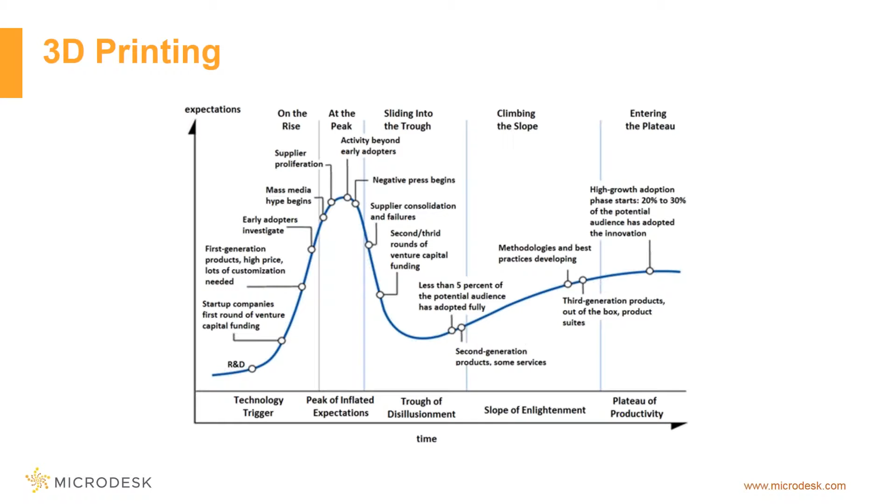Materials aren't the only advancement that's allowing 3D printing to be looked at again for infrastructure. Robotics have created the opportunity for additive manufacturing to be performed on site. With guidance from a 3D model, robots are capable of printing in the field and not in a workshop or a lab. We'll witness additive manufacturing robots on site at increasing rates, constructing pipes in the field in accordance with the project model or part specifications, and no more ordering, just basically programming.

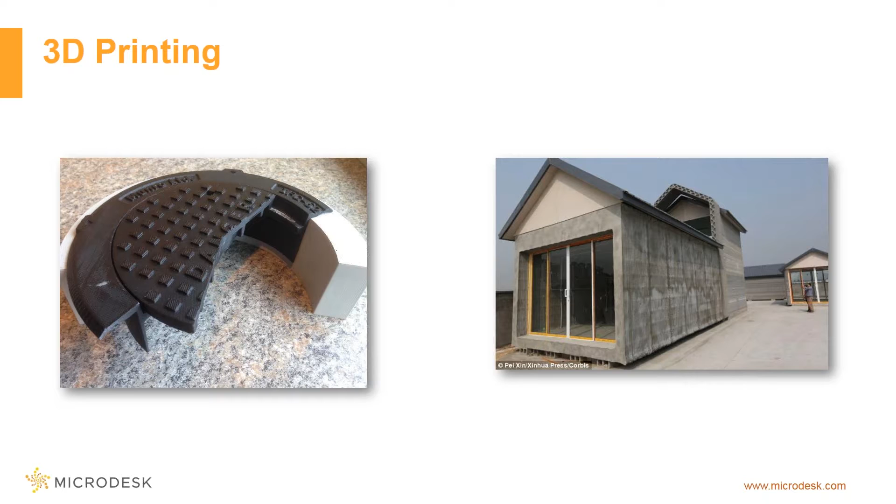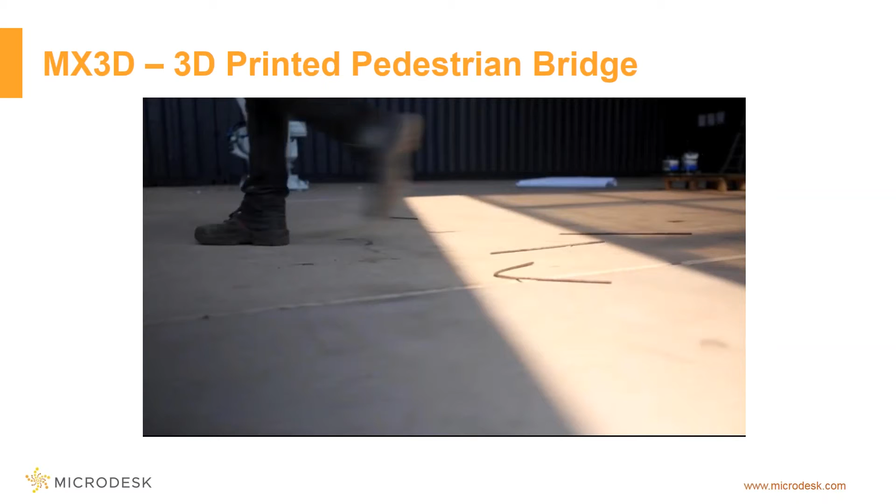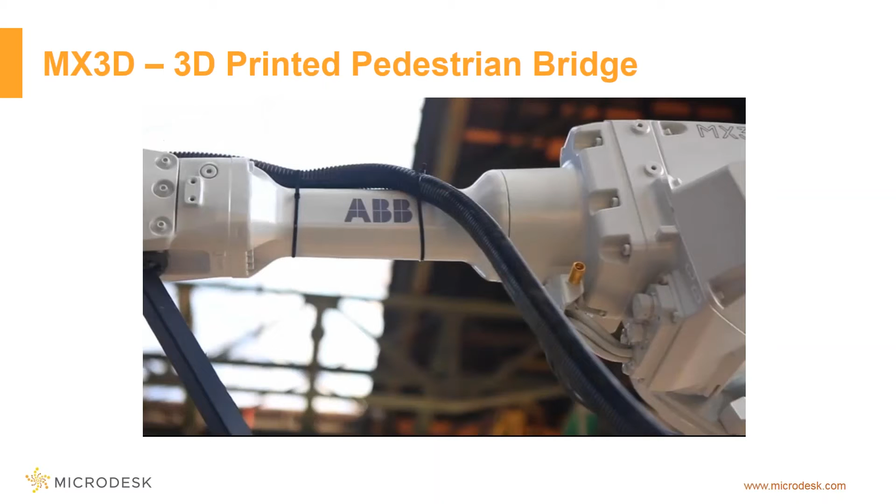In Amsterdam, MX3D is leading efforts in using material advancements in high-strength steel and robotics to build a pedestrian bridge. MX3D has been developing robotic 3D printing since 2015, with the goal of 3D printing a pedestrian bridge over a canal in the red light district of Amsterdam.

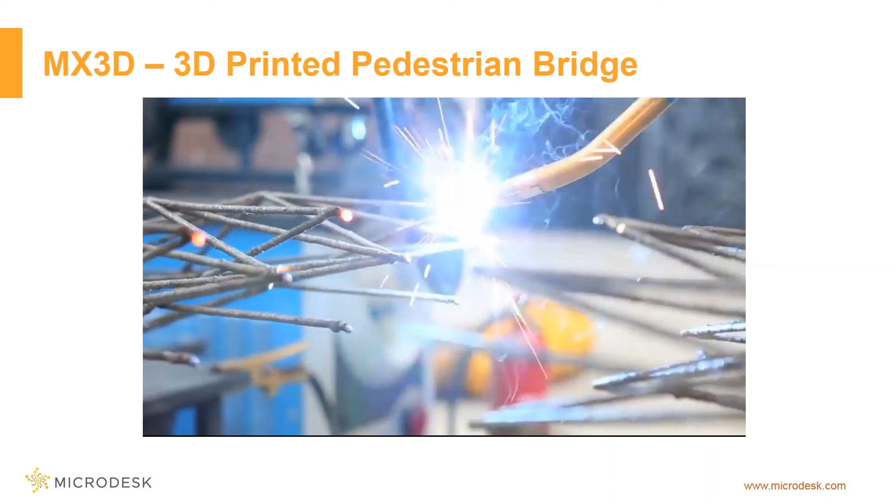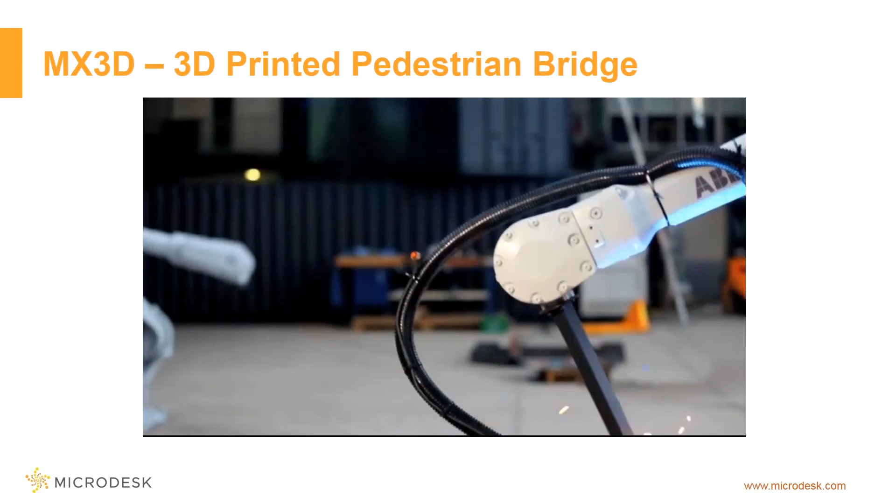They use their robots to draw steel structures using guidance from 3D models. The robots printed on 6 axes, allowing construction of the bridge to happen on site and not in a manufacturing workshop. The robots are essentially welding drops of steel over a period of time.

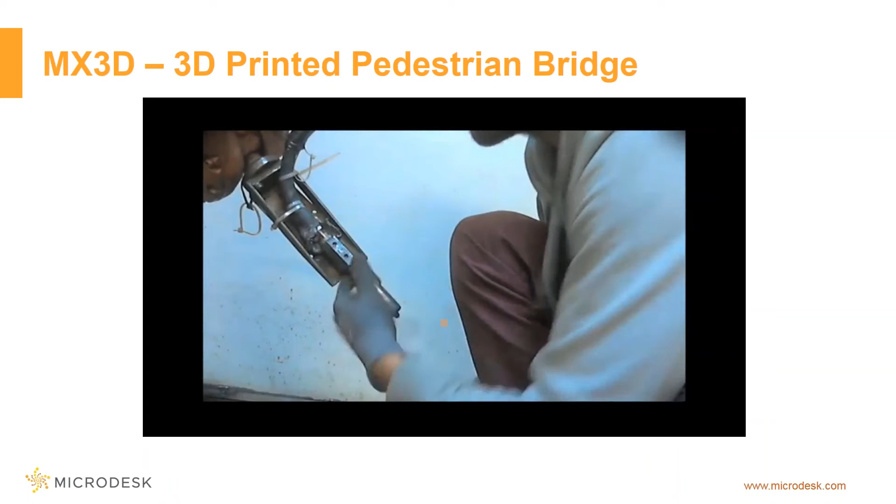They experienced challenges along the way, like a welder exploding and the robot getting disoriented. But they persisted through, and they were able to start building lines and curves in basically what seemed like midair.

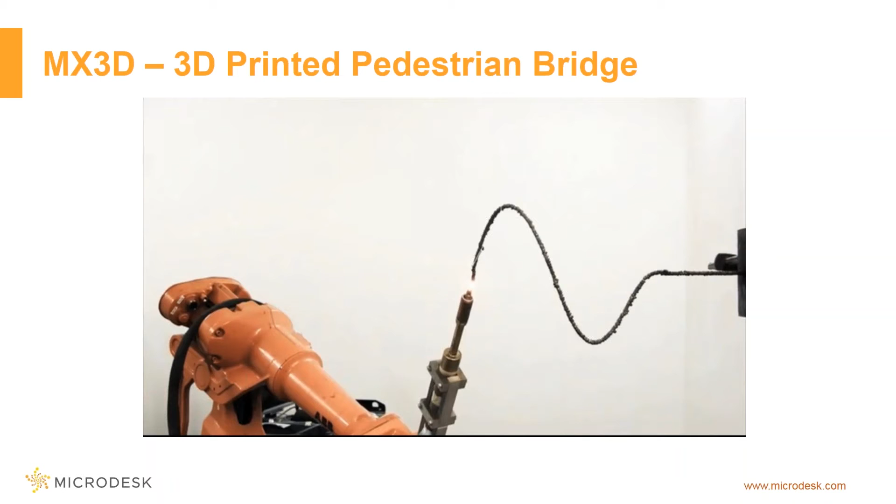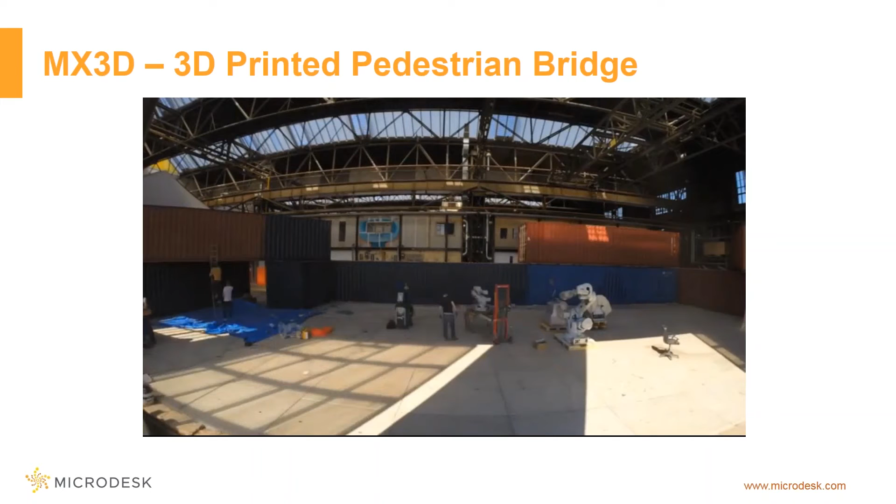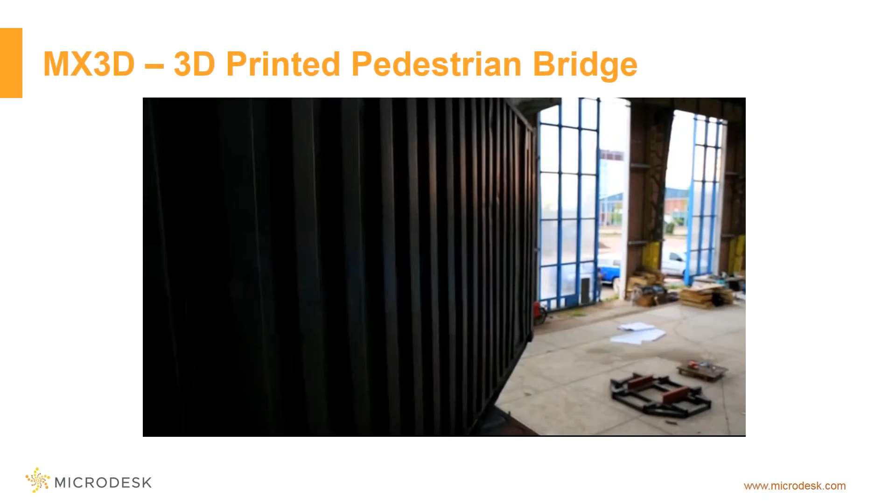So we've covered the most prominent emerging infrastructure technologies in our webinar today. Unmanned aerial vehicles are increasingly being used to analyze existing conditions, perform infrastructure inspections, and provide updates to our construction projects. The Internet of Things is delivering data faster than we can even process it. But we're learning to prioritize, store, and distribute the data, to plan, construct, and monitor our global infrastructure.

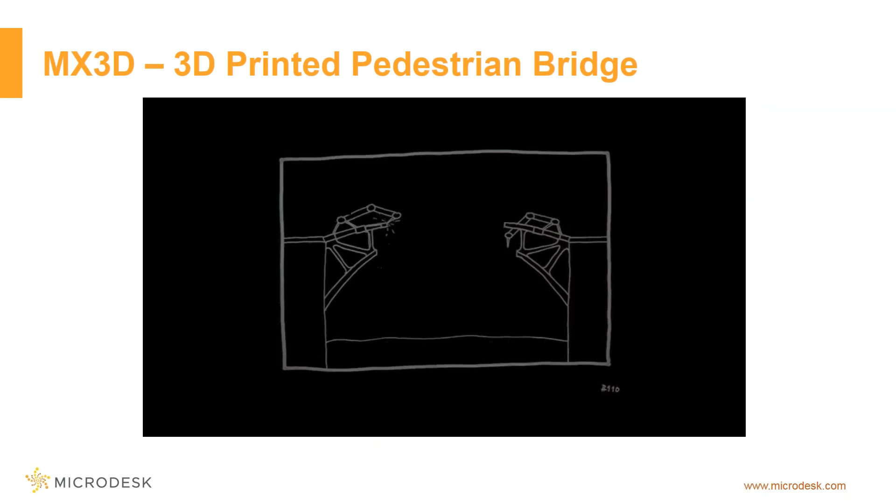3D printing is a re-emerging technology that's now allowing the materials and robots to reach new advancements, where the technologies can interact and construct infrastructure on site. So before you leave, think about how your organization can adapt to adopt these emerging technologies.